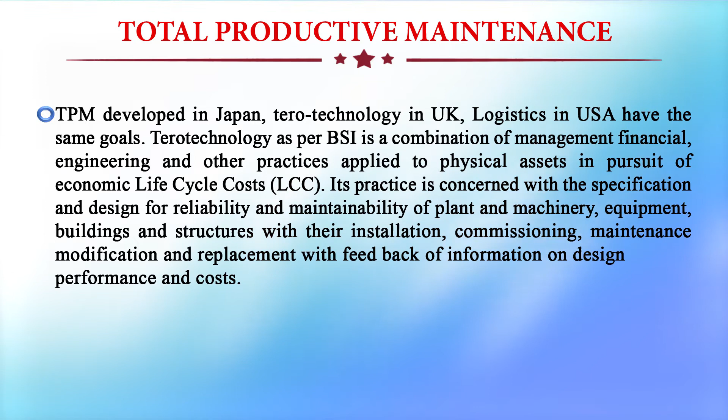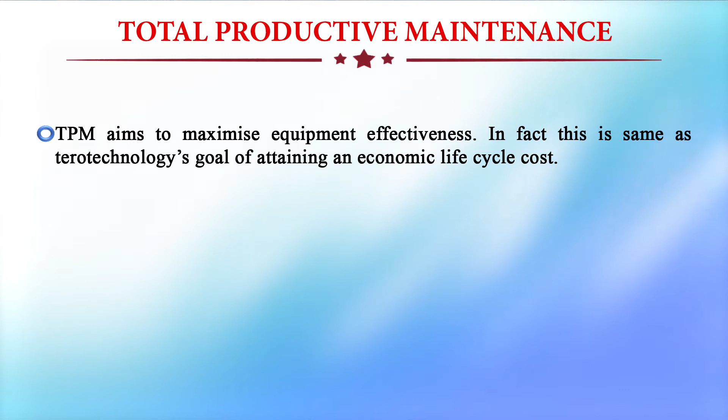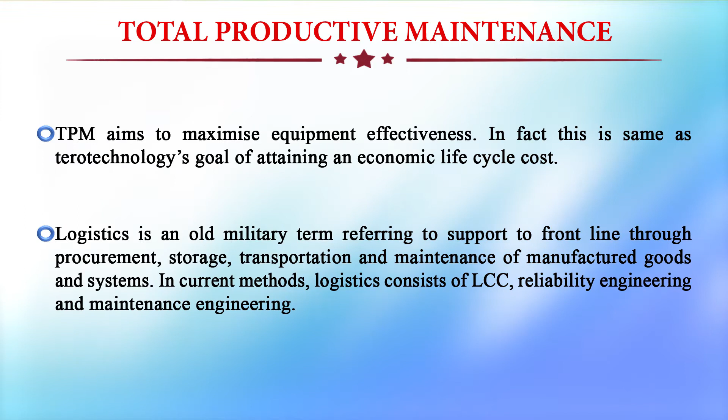TPM aims to maximize equipment effectiveness. In fact, this is same as terotechnology's goal of attaining an economic life cycle cost. Logistics is an old military term referring to support to frontline through procurement, storage, transportation and maintenance of manufactured goods and systems. In current methods, logistics consists of LCC - life cycle costs, reliability engineering and maintenance engineering.

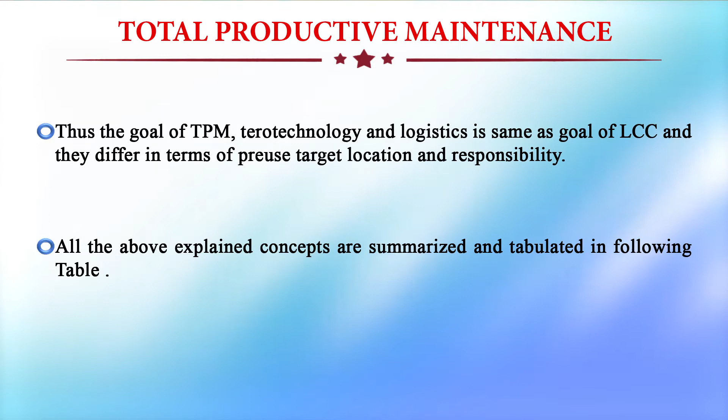Thus, the goal of TPM, terotechnology and logistics is same as the goal of LCC, and they differ in terms of pre-use, target, location and responsibility. All the above explained concepts are summarized and tabulated in the following table. So, various maintenance strategies are given in the following table - the maintenance strategies and their central themes.

First, failure based maintenance - the central theme is to correct or rectify the failures and restore the usable condition of the equipment. Second, time based maintenance - to maintain the machine after a certain predetermined period of time.

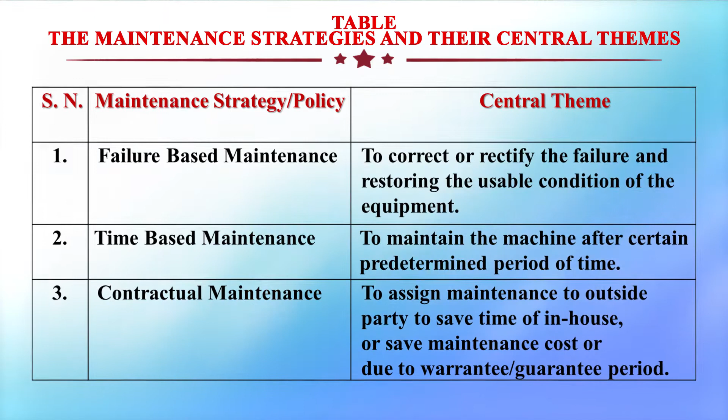Third, contractual maintenance - to assign maintenance to an outside party to save time of in-house work or save maintenance costs, or due to warranty/guarantee period. Reliability centered maintenance - to enhance the reliability of the equipment and build the confidence of the user. Condition based maintenance, or dynamic or predictive maintenance - to improve the condition and performance of the equipment.

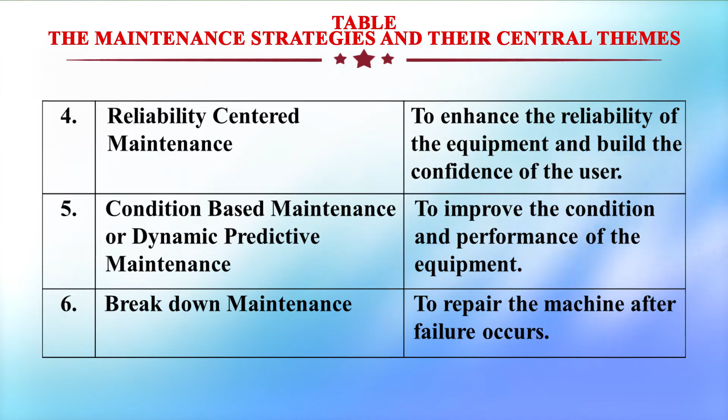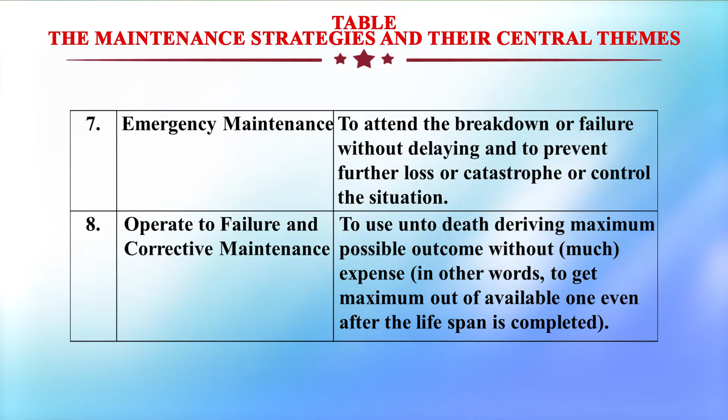Then breakdown maintenance - to repair the machine after failure occurs. Emergency maintenance - to attend the breakdown or failures without delaying, to prevent further loss or catastrophe or control the situation. Operate to failure and corrective maintenance - to use unto death, deriving maximum possible outcome without expense. In other words, to get maximum output of the available unit even after the lifespan is completed.

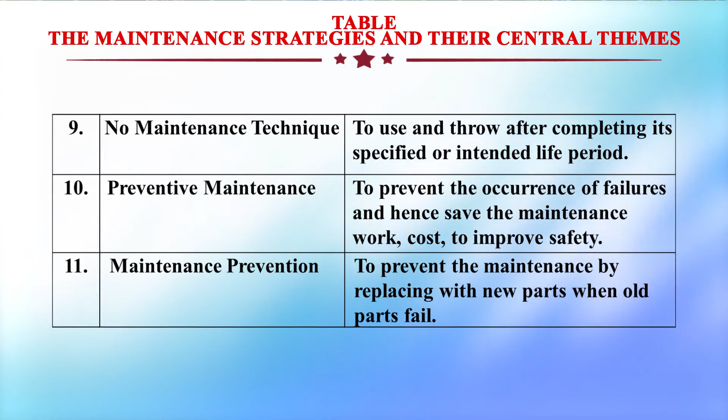No maintenance technique - to use and throw after completing its specified or intended life period. Preventive maintenance - to prevent the occurrence of failures and hence save maintenance work and cost, and to improve safety. Maintenance prevention - to prevent the maintenance by replacing with new parts when old parts fail.

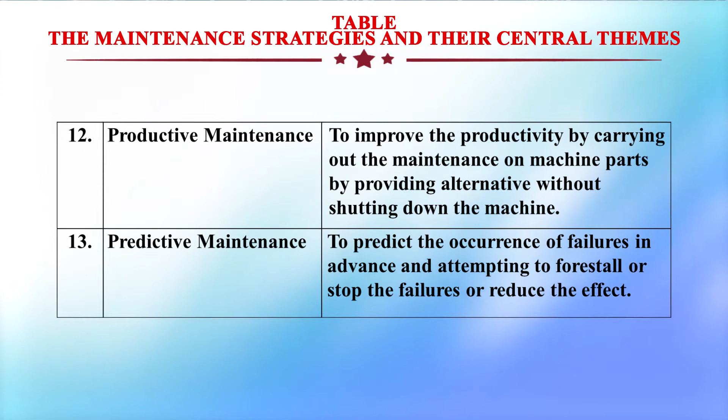Twelfth, productive maintenance - to improve productivity by carrying out maintenance on machine parts by providing alternatives without shutting down the machines. Predictive maintenance - to predict the occurrence of failures in advance and attempt to forestall or stop the failures or reduce their effect.

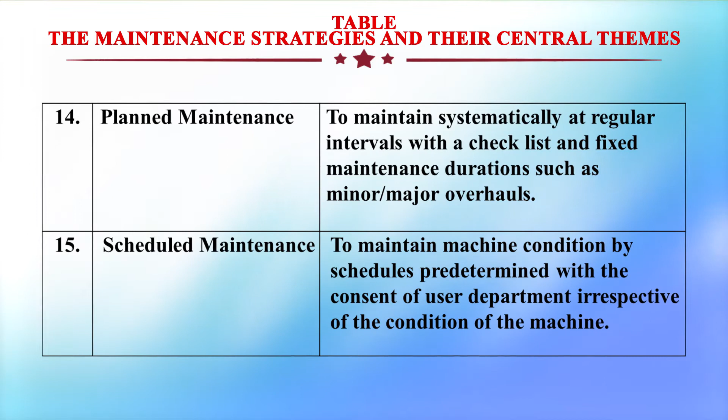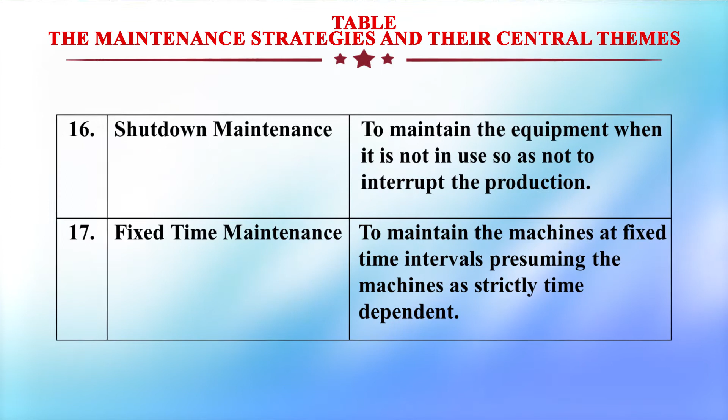Planned maintenance - to maintain systematically at regular intervals with a checklist and fixed maintenance duration such as minor or major overhauls. Scheduled maintenance - to maintain machine condition by schedules predetermined with the consent of the user department, irrespective of the condition of the machine. Shutdown maintenance - to maintain the equipment when it is not in use, so as not to interrupt production. Fixed time maintenance - to maintain the machines at fixed time intervals, presuming the machine as strictly time dependent.

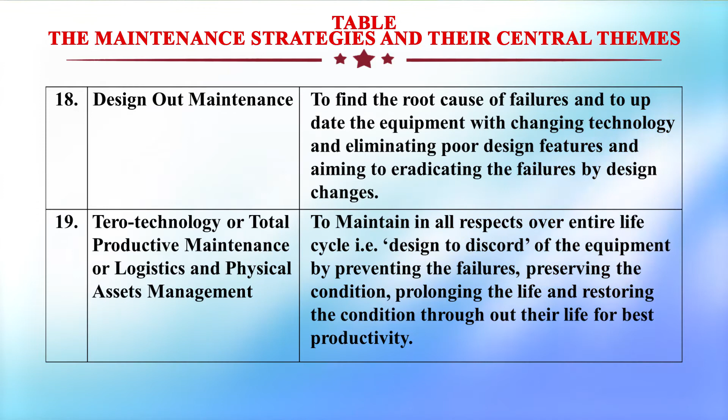Then design out maintenance - to find the root cause of failures and update the equipment with changing technology, eliminating poor design features and aiming to eradicate failures by design changes. Tero-technology, or total productive maintenance, or logistics and physical assets management - to maintain in all respects over the entire life cycle, that is, design to discard of equipment, by preventing failures, preserving the condition, prolonging the life and restoring the condition throughout the life for best productivity. This is known as productive maintenance.

Then, factors influencing the selection of maintenance policy or strategy. Here the various factors influence - we have learned about the various maintenance strategies, various maintenance policies. So in an industry, it has to select which method to use, and that depends upon various factors. What are those factors? You have now learnt the following maintenance policies and the methods used under them.

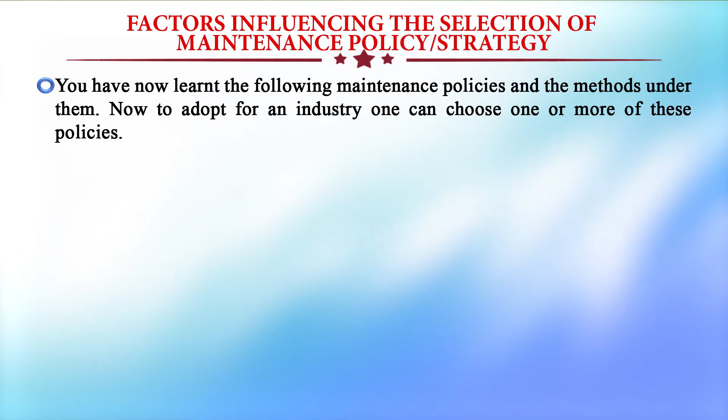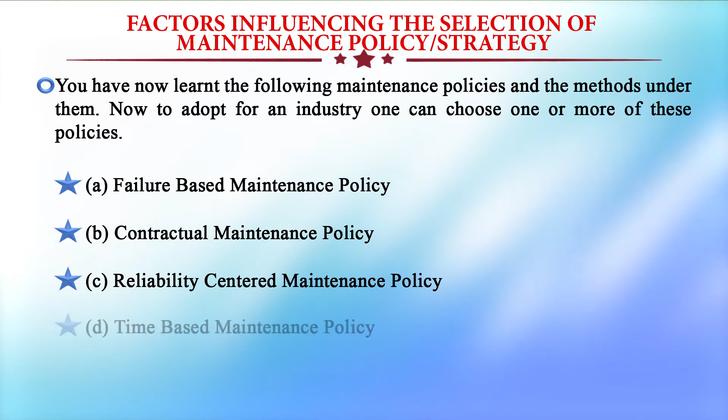Now, to adopt for an industry, one can choose one or more of the policies, which are failure based maintenance policy, contractual maintenance policy, reliability centered maintenance policy, time based maintenance policy, condition based maintenance policy and total productive maintenance policy. Depending on the requirement, we can take these policies in suitable proportions. We can even find an appropriate combination of the methods under these policies. We can consider one policy for a few machines and another one for some other machines.

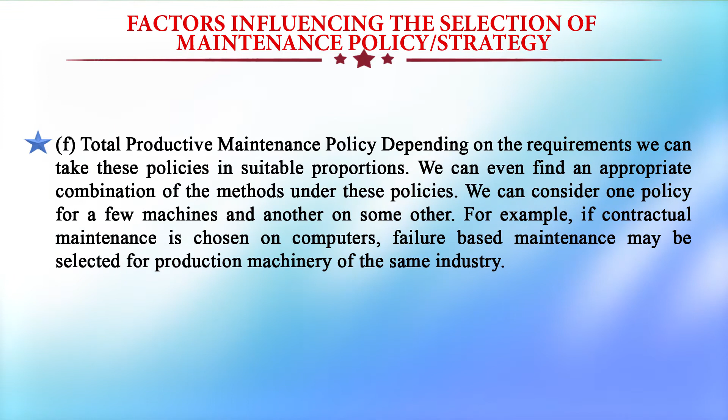For example, if contractual maintenance is chosen on computers, failure based maintenance may be selected for the production machinery of the same industry. Similarly, the electrical part may be considered for time based maintenance, while mechanical parts may be observed by condition based maintenance for a diesel generator.

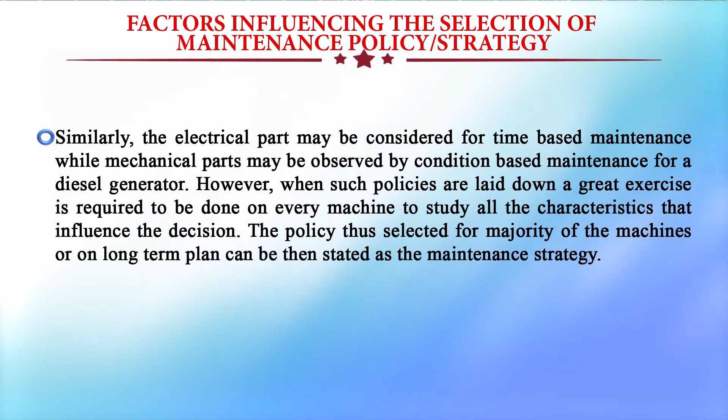However, when such policies are laid down, a great exercise is required to be done on every machine to study all the characteristics that influence the decision. The policy thus selected for majority of the machines, or on long term plan, can be then stated as the maintenance strategy.

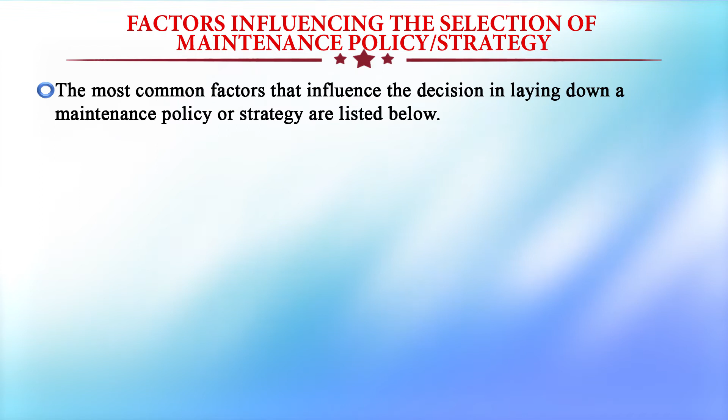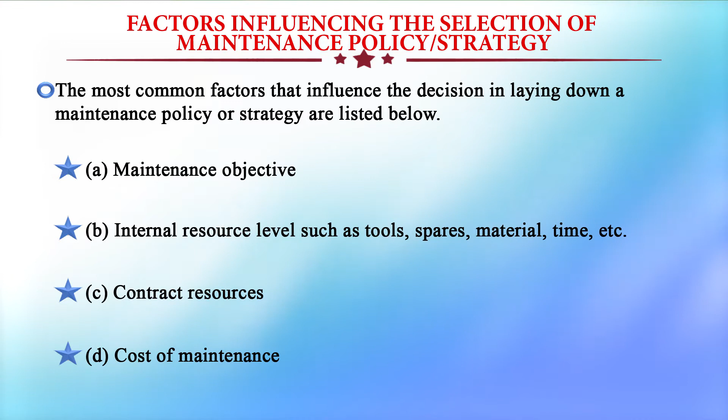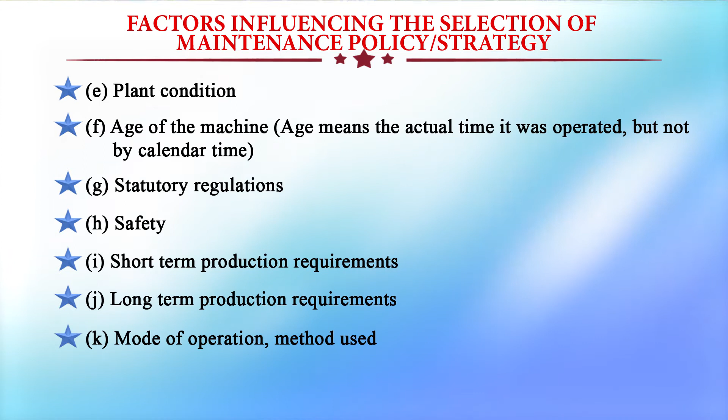The most common factors that influence the decision in laying down a maintenance policy or strategy are listed below: maintenance objectives, internal resource level such as tools, spare parts, materials, time, etc. and contract resources, cost of maintenance, plant condition, age of the machines, statutory regulations, safety, short term production requirements, long term production requirements, mode of operation, method used, material and their quality levels, quality policy of the company, guarantee warranty, cycle time and length of the time that the machine is run uninterruptedly after its starting, machine characteristics and specifications, operating conditions, environmental conditions, availability of spares, technological competence.

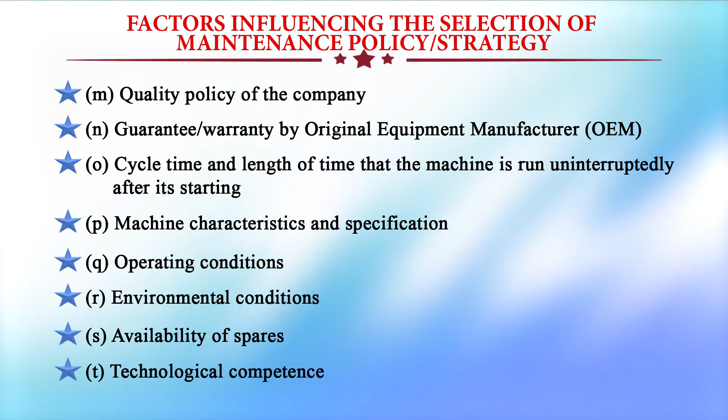Maintenance strategy formulation. Then how to formulate the strategy of a maintenance. The maintenance strategy is formulated to achieve the maintenance objectives and directing the resources under the given constraints in the form of availability and requirement.

Normally, the maintenance strategy is formulated for long run. However, a due consideration is given to short term production requirements also. More or less, all the above discussed factors have their own influence on formulating the strategy. The main decision is usually concerned with establishment of the level of preventive maintenance needed to bring the output characteristics and maintenance resource levels under control.

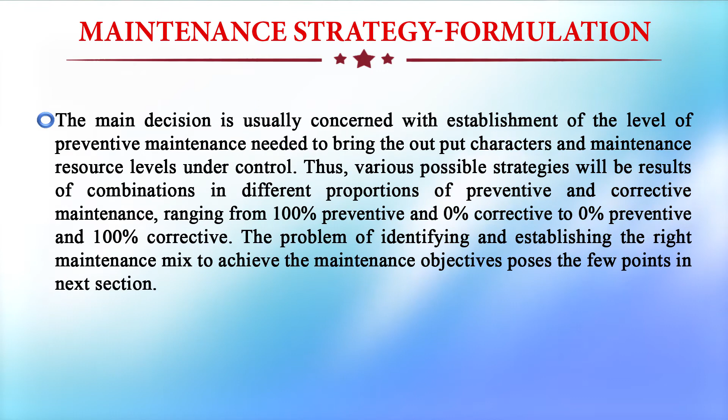Thus, various possible strategies will be a result of combination in different proportions of preventive and corrective maintenance, ranging from 100% preventive and 0 corrective to 0 preventive and 100% corrective. The problem of identifying and establishing the right maintenance mix to achieve the maintenance objectives poses the few points discussed in the next section: the bottlenecks or roadblocks in formulating the maintenance strategy.

The maintenance strategy is a function of relationship between production and maintenance, and hence in most cases it will be subjected to variations. If preventive maintenance work is neglected for a period of time, it results in increase in corrective maintenance work subsequently. Consequently, more pressure will be built up on limited maintenance resources to further neglect preventive maintenance. This in turn may lead to 100% corrective maintenance, that is operate to failure and corrective maintenance policy.

When a machine is operated to failure for a period of time, it has to be brought back to an acceptable condition through corrective maintenance before any strategic decision on preventive maintenance is taken or implemented. Otherwise, this can weaken the preventive maintenance, or the preventive maintenance may become ineffective.

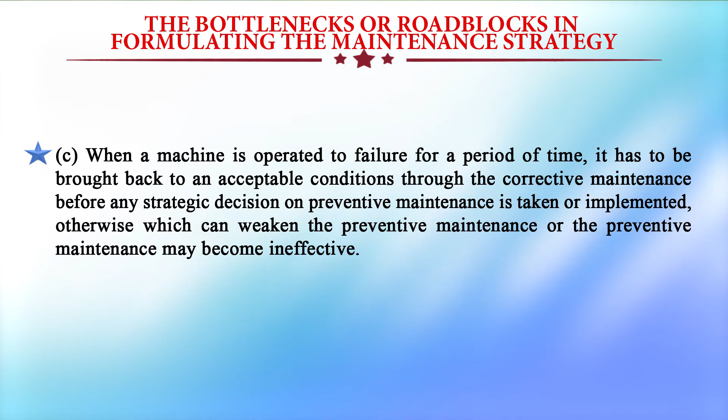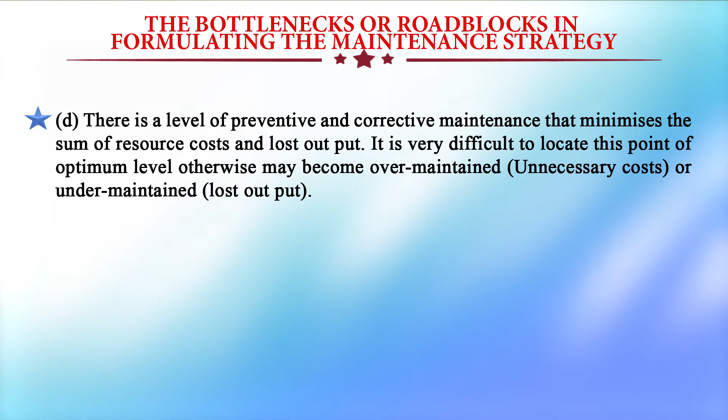There is a level of preventive and corrective maintenance that minimizes the sum of resource costs and lost output. It is very difficult to locate this point of optimum level, otherwise the system may become over maintained or under maintained. The optimum level of preventive maintenance is very sensitive to cost of lost output.

Therefore, as far as possible, the maintenance work should be carried out during the hours in which the machine is not under operation, not run, or under outage.

The maintenance strategy is to be determined by suitable parameters and policy such as time based, failure based, age based, condition based, etc. A preventive maintenance can also be fit in any frame of the above, thus a suitable design is to be made for the conduct.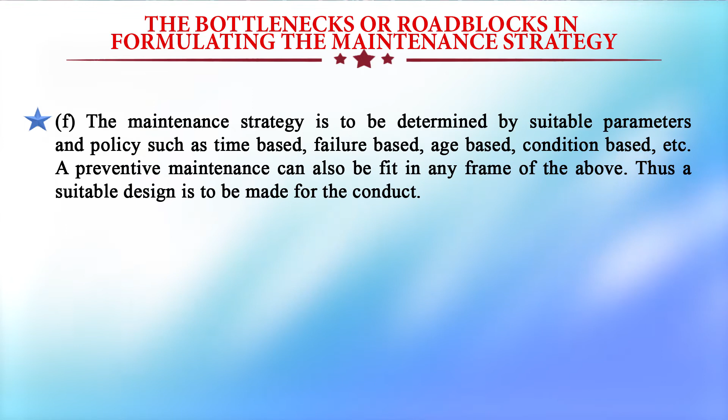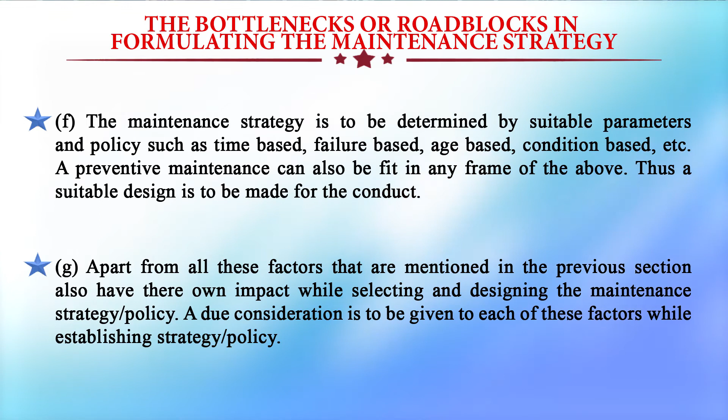Apart from all the factors mentioned in the previous section, which also have their own impact while selecting and designing the maintenance strategy or policy, due consideration is to be given to each of these factors while establishing the strategy.

After laying down an appropriate policy with a suitable maintenance mix, the maintenance operators can be trained according to the norms set. Usually, the procedure followed by the plant engineers in almost all the industries, irrespective of their policy or strategy, is as follows. Step 1.

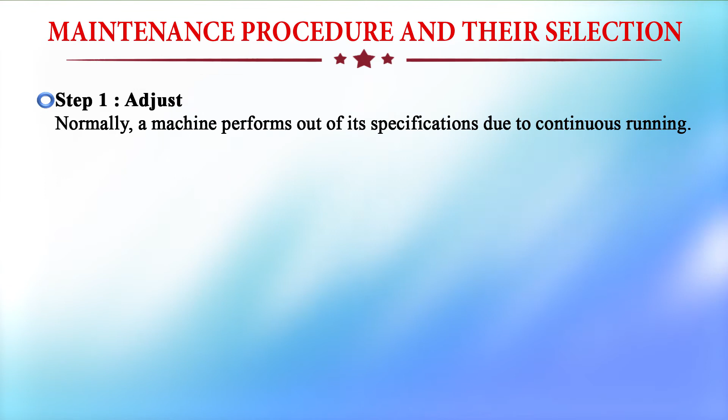Adjust. Normally, a machine performs outside its specification due to continuous running. The machine is to be readjusted properly in its settings. In some cases, this may be termed as calibration also. With simple adjustments, the machine will become alright.

To carry out this operation, the plant engineer or the maintenance operator should have thorough knowledge on the design of the machine as well as its performance characteristics. It will be an added advantage if the plant engineer has got the past data and history of the machine if the machine is old.

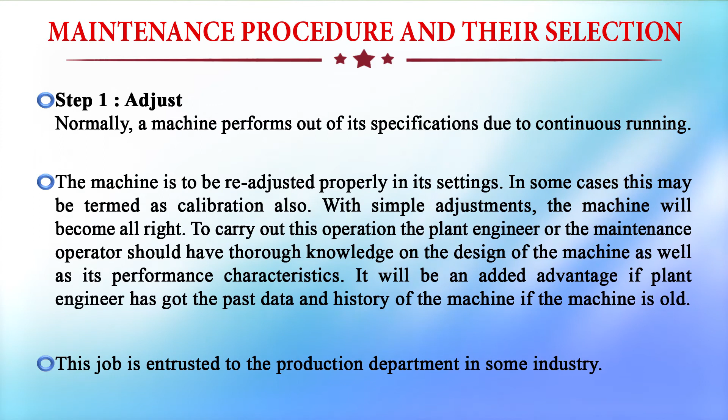This job is entrusted to the production department in some industries. Step 2, simple repair: often the machine can be repaired with minor repairs, unless the machine experiences a fatal accident or is subjected to severe wear or misoperation.

In the latter cases, the fault can be found easily since it is seen with the naked eye, but in the case of small repairs only, it is very difficult to locate and identify the problem. Once identified, it is simple to repair, but simple may become complex if not identified in time. Simple repair also includes periodic checkup or checking of parameters at regular or irregular intervals based on hours, miles, output of production, or some combination of these, and making necessary repairs.

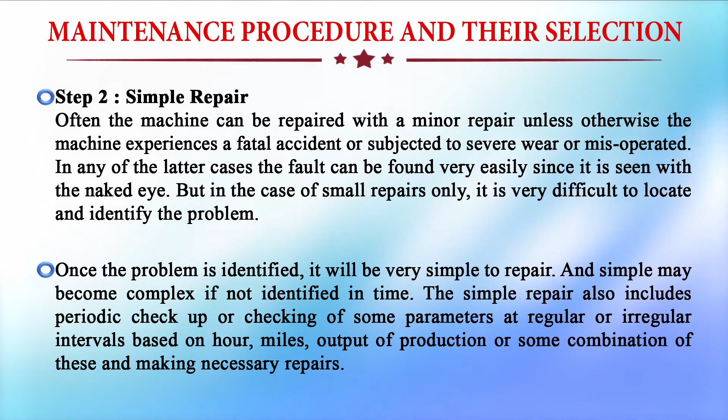Step 3, in situ repair or in situ replacement. A machine can fail due to failure of a component or part, often referred to as in situ replacement or in situ repair in plant engineering terminology. In certain circumstances, it may be considered with least replaceable assembly, in which the total assembly of the part may be taken out of the machine and replaced with a standby assembly.

The removed assembly may be taken to the plant engineering department and repaired for next use or as standby. This repairing requires sufficient stock of components, spare parts, or standby units which are most likely to fail, which is statistically predictable. Then step 4, design out maintenance.

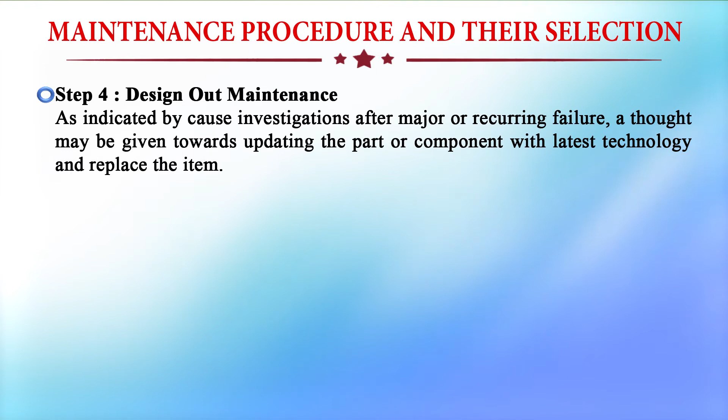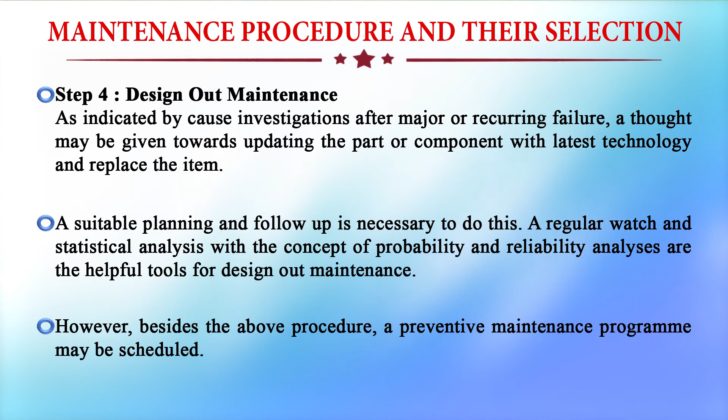As indicated by cause investigation after major or recurring failures, thought may be given to updating the part or component with latest technology and replacing the item. Suitable planning and follow-up is necessary to do this. Regular watch and statistical analysis with the concept of probability and reliability analysis are helpful tools for design out maintenance. However, besides the above procedure, a preventive maintenance program may be scheduled.

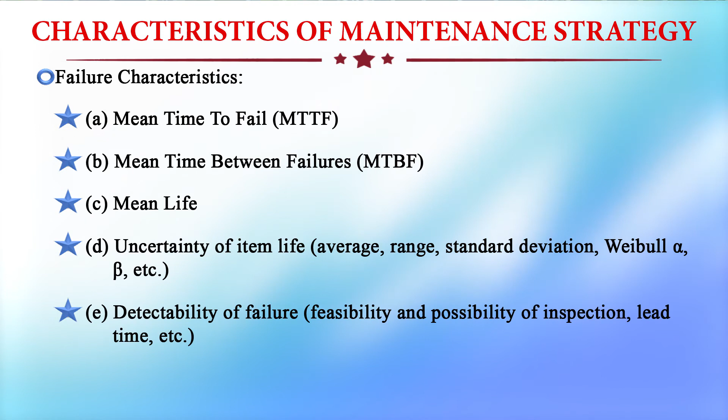Characteristics of maintenance strategy: while establishing the best strategy, the maintenance manager is required to study the following characteristics: failure characteristics, mean time to failure, mean time between failure, mean life, uncertainty of item life, detectability of failures, replacement and repairability.

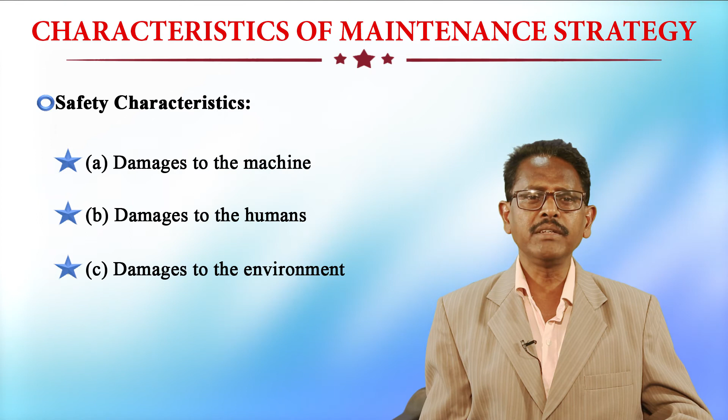Another one is cost characteristics: cost of preventive actions, consequence of failures, cost of labor on repair, cost of spares, indirect costs, other costs. Safety characteristics: damage to the machine, damage to humans, damage to the environment, statutory safety regulations. These are the various characteristics of maintenance strategy.

Operating and production characteristics: process, product, type of production, output, resources and their properties, quality level. Out of the above characteristics, the last one is not considered in certain organizations, while in others it may not physically exist. These are discussed in detail in subsequent units.

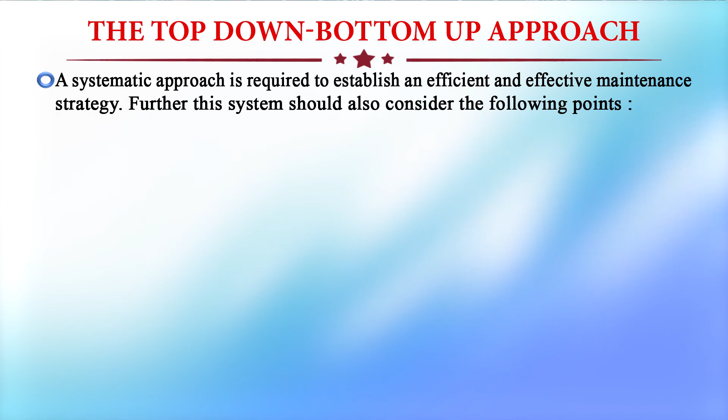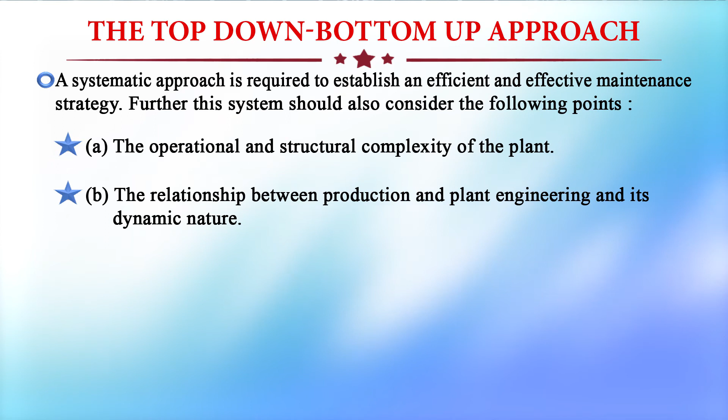The top down bottom up approach. A systematic approach is required to establish an efficient and effective maintenance strategy. Further, this system should also consider the following points: the operational and structural complexity of the plant, the relationship between production and plant engineering and its dynamic nature, and the relationship between maintenance strategy, maintenance objective, workload and resource availability.

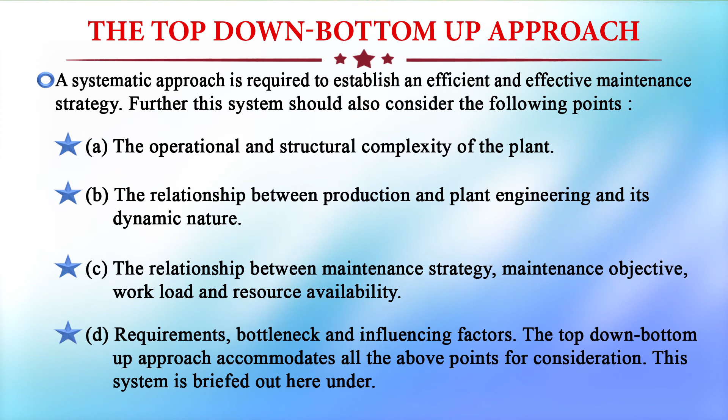Requirements, bottleneck, and influencing factors. The top down bottom up approach accommodates all the above points for consideration. This system is briefed out here under step 1.

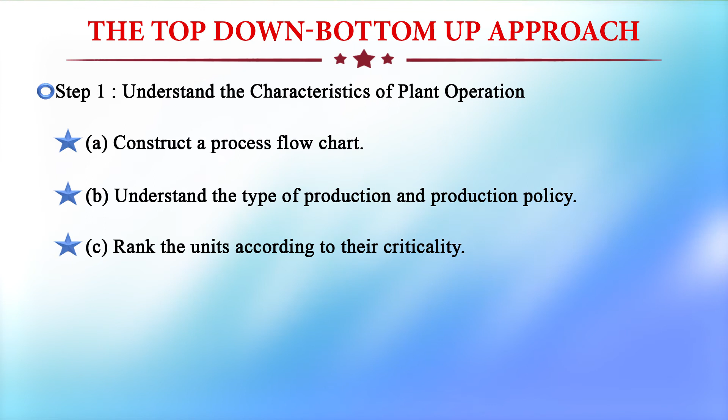Understand the characteristics of the plant operation, construct a process flow chart, understand the type of production and production policy, rank the units according to their criticality, identify the maintenance scheduling characteristics, identify the prevailing maintenance strategy and maintenance objectives.

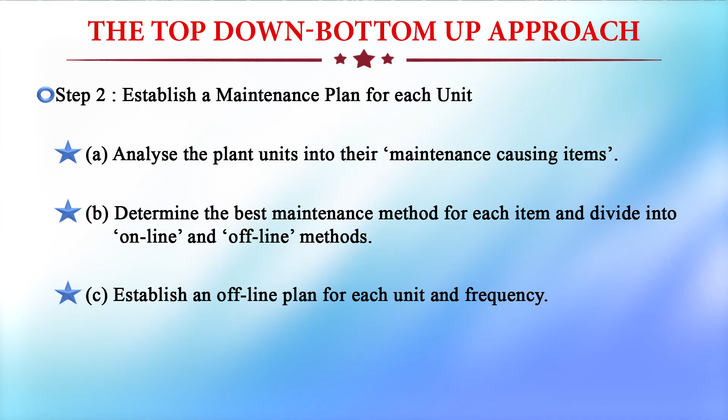Establish a maintenance plan for each unit. Analyze the plant units into their maintenance causing items, determine the best maintenance method for each item, and divide into online and offline methods. Establish an offline plan for each unit and frequency, identify the corrective maintenance guidelines.

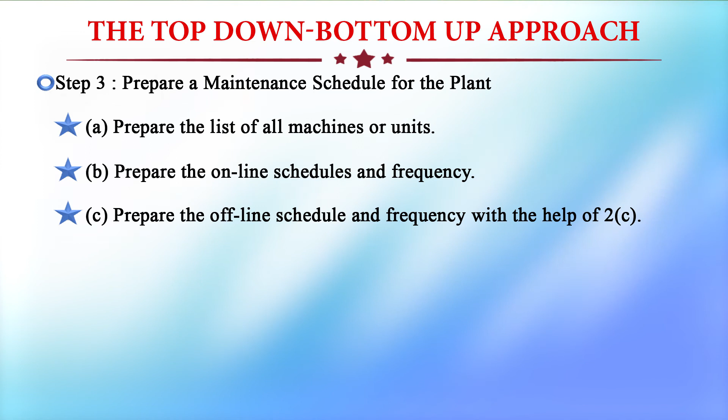Then step 3: prepare a maintenance schedule for a plant, prepare the list of all machines or units, prepare the online schedule and frequency, prepare the offline schedule and frequency with the help of 2C, estimate the planned workload for online and offline schedules based on the information in 3B and 3C, also forecast the expected and unexpected unplanned workload by experience, review the schedules once again, and check accordance with actual resources available.

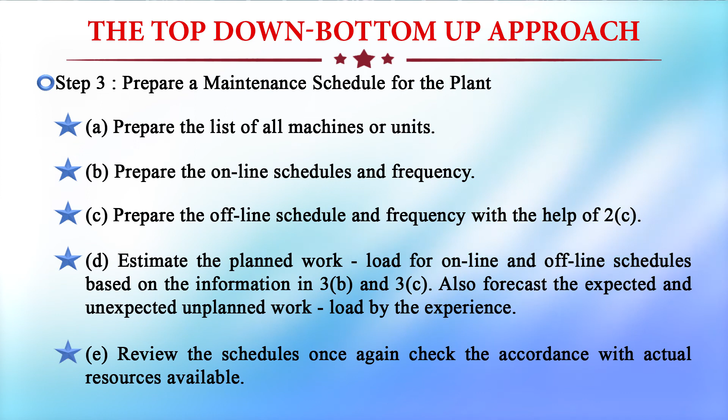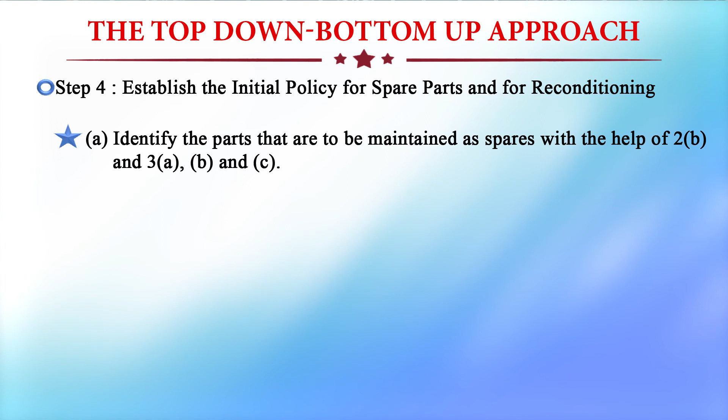Step 4: establish the initial policy for spare parts and for reconditioning. Identify the parts that are to be maintained as spares with the help of 2B and 3A, B and C. Consider the overall plant demand for spare parts and repairable items to determine the spares inventory policy.

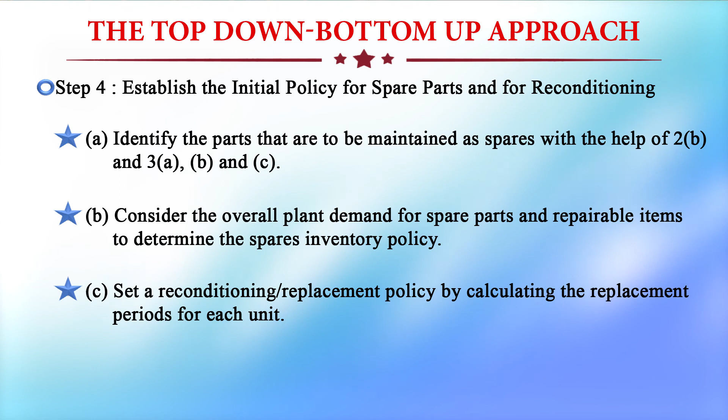Set a reconditioning and replacement policy by calculating the replacement periods for each unit. Consider all safety and quality standards to maintain.

Learners, I hope after listening to this video lecture you might have understood about condition based monitoring, total productive maintenance, maintenance strategy selection, maintenance strategy formulation, bottlenecks in formulating maintenance strategy, and maintenance procedures and selection. So, with this I conclude.